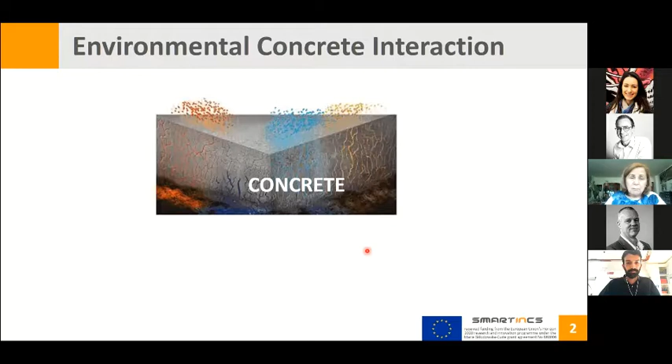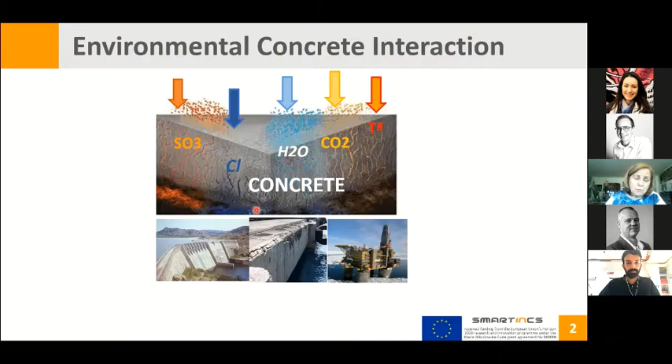Certainly the concrete is interacting with the environment from the very beginning it is located in the structure. There are many reasons for this interaction, parameters like SO3, chlorides penetrating through the concrete, water, CO2, temperature. In any case, when these agents introduce into the concrete, they cause several damages.

These types of interactions have chemical, physical, and mechanical effects, and in general all of them cause mechanical failures. We have heard about shrinkage and cracking generated by Erik Schlangen, water permeation addressed by Marta Roig, and also problems when we have sulfates and a very low temperature.

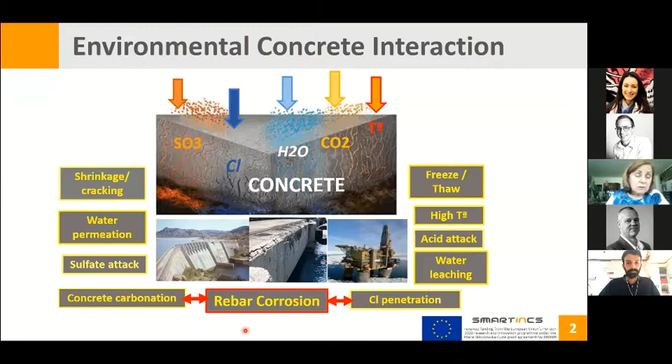Vanessa explained very well the acid attack or water leaching. But there are other interactions with the environment, like the reduction of the high alkalinity, carbonation, or chloride penetration. These two aggressives in general don't cause any specific damage in the concrete cover, however they are very dangerous for the rebar. So that is the reason we are concentrating on rebar corrosion.

I prefer to start by making a review of what can happen in the case of corrosion, to set the frame for the study. We start with the situation that our reinforcement is passive in the environment due to the high pH. However, due to interaction with aggressives like chlorides or CO2, they will penetrate through the cover and reach, in a certain time depending on the concrete cover characteristics, the reinforcement.

In the case of a decrease in pH, we have very small anodes and cathodes that cause the initiation of corrosion, extending more generally over the surface of the reinforcement. However, in the case of chlorides, this penetration generally locates attacks at specific points, so we have very small anodes with regard to larger cathodes, causing higher corrosion rates.

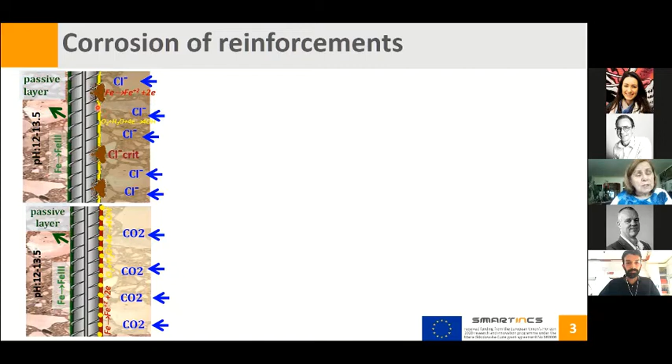Within the initiation period, we are interested in the transport of the aggressives, which is generally quantified by diffusion coefficients, and also the initiation of corrosion, which indicates the depassivation and the breaking of the passive layer. When we have chlorides in the system, they reach the rebar surface, but corrosion is not initiated at that moment.

The chlorides need to be accumulated at the rebar level until a certain threshold is reached and corrosion is initiated. In the case of carbonation-induced corrosion, the pH has to decrease below the passive threshold. This is due to the interaction of CO2 that penetrates through the pores, dissolves in the water, and reacts with alkaline components in the cement base like portlandite. Progressively, the pH decreases, and when it reaches a certain level, corrosion is also initiated.

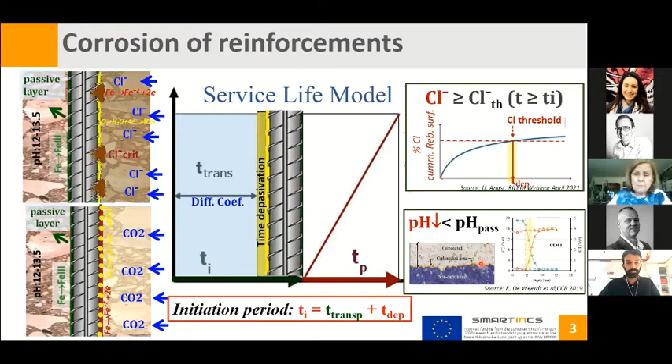Once we have this frame for corrosion of the reinforcement, we need to identify the transport of the aggressives, keeping in mind there is large variability in this identification, because there are many parameters influencing it depending on the concrete cover characteristics and the environment. For the second part, the depassivation period, we need to identify the time until corrosion is initiated, which depends on the aggressive and the characteristics at the steel-concrete interface.

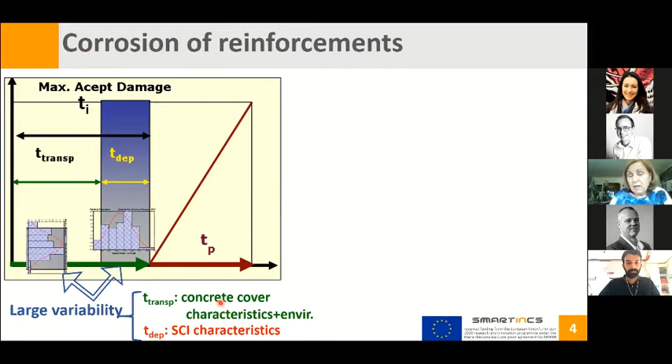To understand better the steel-concrete interface, I think this picture from the RILEM Committee paper identifies the different parameters that can influence corrosion initiation, such as air voids or the presence of oxides. We can see here that the crack is one of the parameters that influences this corrosion initiation.

The crack finally is not only a path for more rapid penetration of the aggressives, but it also changes the micro-chemical or micro-electrolyte environment at the rebar level, and so that changes the passive layer and, of course, the initiation of corrosion.

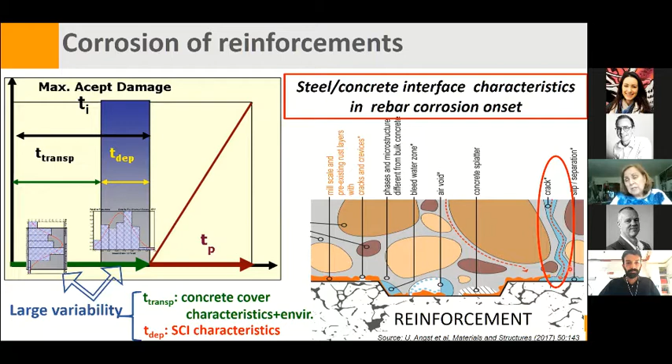So let us now move again to the crack, the presence of crack in concrete. As Eric was commenting, the structures are designed for cracking. They many often have cracks that we can observe in these pictures. Even these cracks can be healed and sealed along its life, or can remain unsealed.

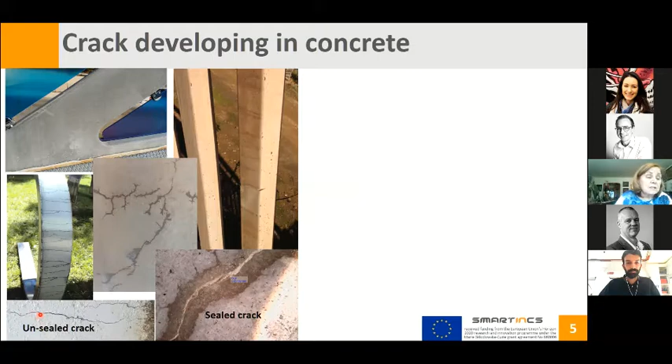How can this crack, in particular this deformation crack, appear when the structure is in operating condition? Consider we have under tensile stress, a crack appears and reaches the surface, which we identify as a primary crack. Also, due to these forces, some other cracks like secondary cracks can appear, and some others remain inside as internal cracks. Finally, what we have on the surface is a pattern of several cracks, transversal and longitudinal to the reinforcement.

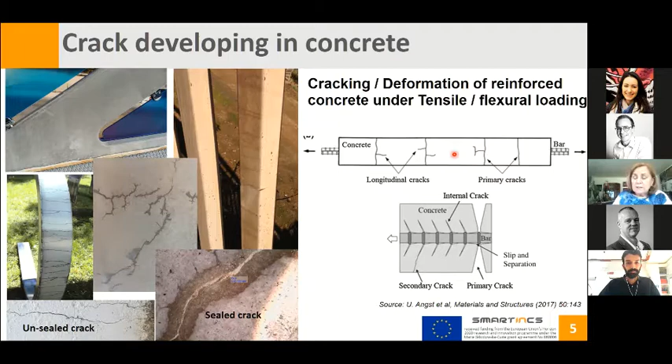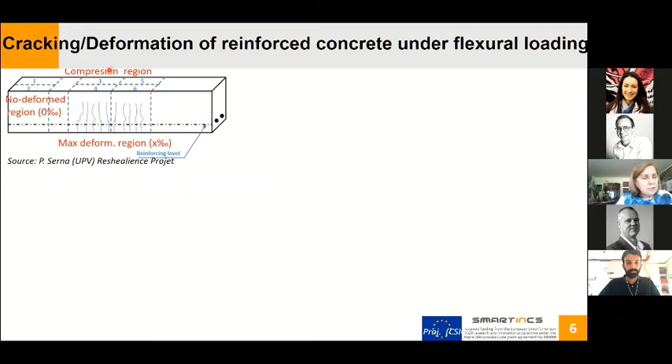These multi-crack conditions we have tried to simulate very well with Pedro Serna in the ReSHEALience Project. We are working together, producing this type of element that has been bent at steel bending points, locating several multi-cracking regions, the compression region with no cracks, and also the lateral regions with no significant cracking.

Analyzing this crack, we have a crack width on the surface depending on the deformation of the element, and depending on the type of concrete, the appearance of this crack is completely different, and also the size. You can see here the length and the distance between them is different and much higher in comparison with ultra high performance fiber reinforced concrete, which has a smaller length of cracks and a smaller width. We can also have regions with much smaller crack size.

We also need to take into account the crack depth, because these cracks can penetrate or not through the cover, and may not be able to reach the reinforcement, or may penetrate and reach the reinforcement, and even overpass and reach a second level of reinforcement. But how can these cracks influence corrosion initiation?

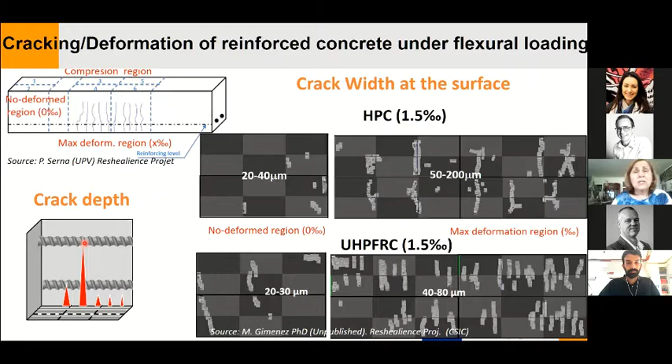Now is the moment to understand what happens with concrete in the analysis of the transport properties, one of the main parameters to analyze the service life of the structure. We are considering the transport that depends on the concrete cover and the environment.

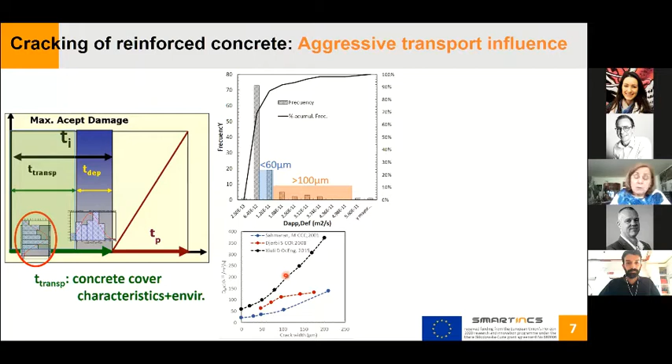Doing an analysis of the literature with chloride transport in different types of concretes, even in situ, we can observe that generally most results are accumulated in this region, but very high chloride transport in this case, or very low, depending on the quality of the concrete. When considering the presence of cracks, although there is not much information on that, it's clear that all authors agree there is a clear increase in the transport of aggressives, even coming from small cracks, and that it exponentially increases when the size increases. The diffusion coefficient depends on the size of the crack.

But can self-healing help and reduce the transport of aggressives? Although there is not much information in the literature, and we hope to improve this with the SmartInCs project, there are some papers that address autogenous self-healing. Although this is the uncracked situation and this is the cracked situation, after a self-healing process, the authors consider that there is a decrease in the chloride transport.

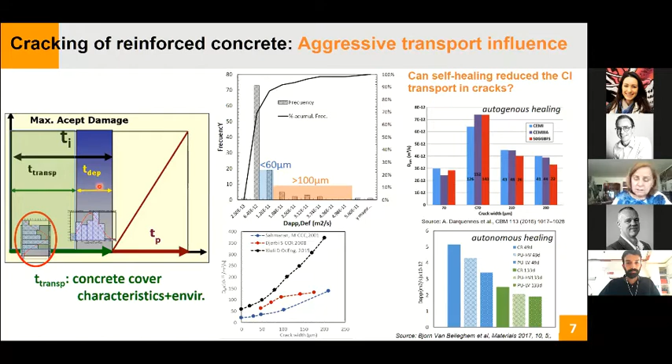This effect has also been observed with autonomous healing, which depends on the type of self-healing agent — in this case, polyurethane. This was also addressed by Nele De Belie in his talk, and they also observed a decrease in the chloride transport. So there are preliminary results indicating that self-healing can contribute to and enhance the durability of cracked structures.

For the initiation of corrosion, we need to deal with the moment corrosion is initiated, the depassivation moment. We need to characterize the rebar and use electrochemical techniques to identify when corrosion is initiated, either corrosion rate or corrosion potential. To remind again, we are in this situation where the aggressive is reaching the reinforcement, but now what we need is the accumulation of this aggressive until corrosion is initiated.

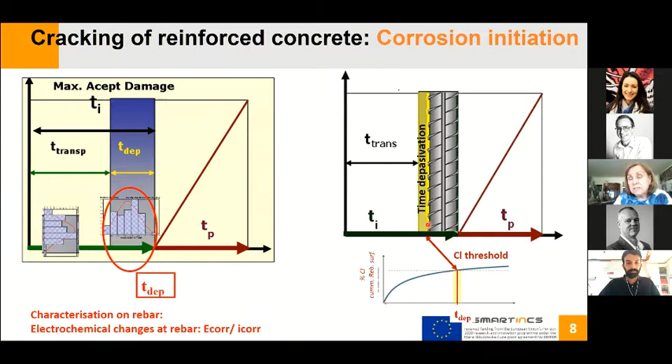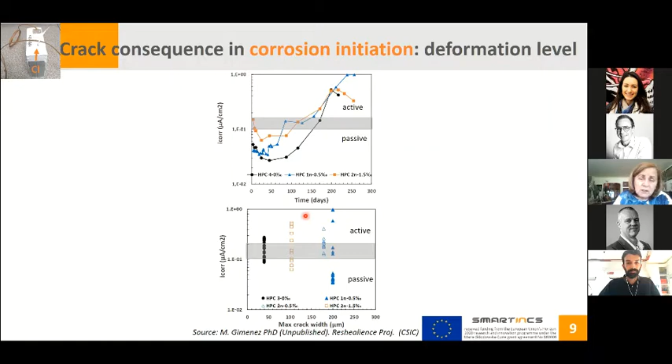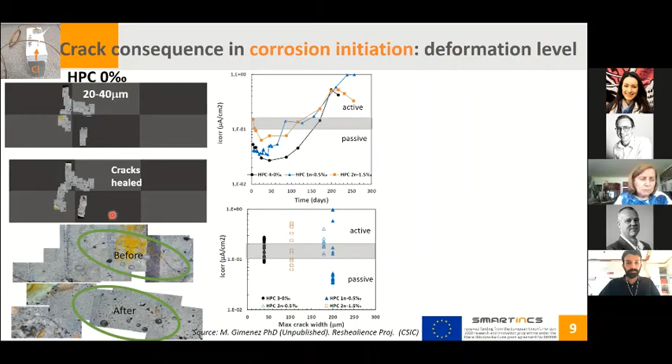What happens in reality? We can have small cracks. This crack can be healed, as observed here. However, the corrosion has been initiated, so it was not enough to support and protect the reinforcement. With higher deformation, the crack is larger, and we can have some healed cracks, but others will remain unhealed, and finally corrosion is initiated. This is before, and this is after exposure.

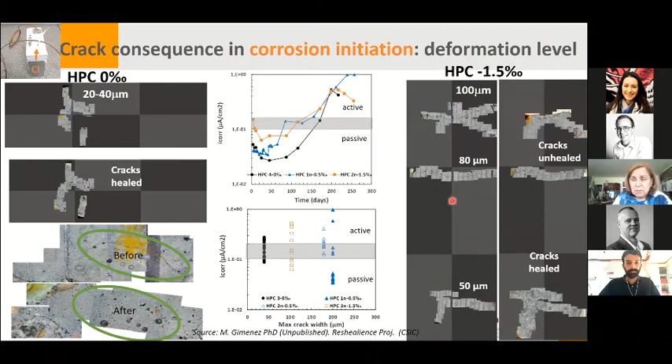But what can be the influence on the type of concrete? Here we are analyzing the high performance concrete and the ultra high performance fiber reinforced concrete, containing in this case also crystalline admixture and nanocellulose.

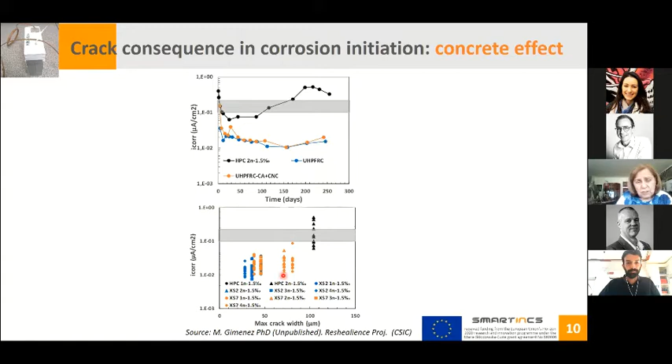While the high performance concrete initiates corrosion, and of course it has higher crack size due to the type of concrete, the ultra high performance fiber reinforced concrete has not initiated corrosion, even for a crack size at the surface close to 100 micrometers.

What we observe in this case with the HPC with 1.5 deformation, this is the initial, but after a period exposed to the environment, there are some cracks that are healed, but some others are not healed, so the corrosion was initiated. In the ultra high performance concrete, we have a different pattern of cracks, different size, and some of them are

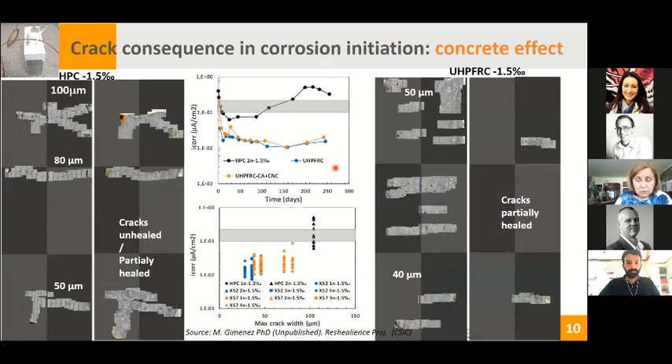healed, and even having some unhealed cracks, corrosion has not been initiated yet. Different reasons can be contributing to this performance.

This is the initial, and this is after the healing. But we have another aspect that we need to analyze in the corrosion initiation, that is the crack depth.

This is the specimen exposed to the chloride environment, and the chlorides penetrate to reach the two levels of reinforcement. In this case, whether you are in the first or in the second level, the corrosion has been initiated at practically the same time, and the crack is relatively high.

So probably the situation that we have here is that the crack penetrates not only the first level of rebar, but also the second level of reinforcement.

When we have the ultra high performance fiber reinforced concrete, however, the situation is significantly improved, and after a similar period of time of exposure, the corrosion is far from being initiated, even in the case of the second level of reinforcement. What could be the situation here?

That the cracks are very thin and are healed, and even if they reach the reinforcement, the corrosion was not possible to be initiated, or the cracks are not penetrating completely to the rebar level, and so they are healed, but the corrosion is not initiated.

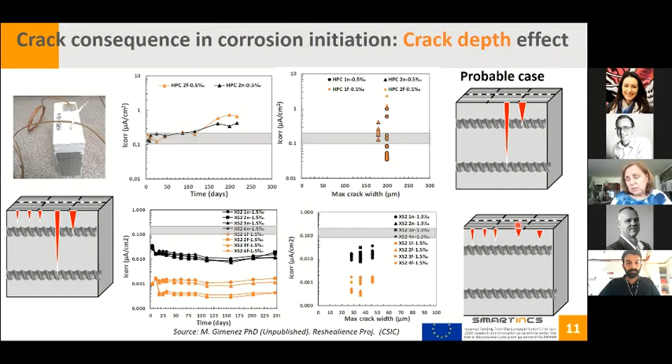But now we need another parameter, that is the chloride threshold. The chloride threshold, we are thinking of the moment of the depassivation, and to determine this time to the depassivation. So we identify the amount of chloride that we need to initiate corrosion.

Analyzing the literature data, we observe that there is a large variability, as I commented, mainly in the level of 0.8, the percentage of total chloride to initiate corrosion. Although the standards consider the value of 0.4 for new structures, and in some standards, they consider the value of 0.6 when they are thinking in service life for corrosion initiation.

There are very few data on this case, and some of them indicate really a clear decrease in chlorides to corrosion initiation.

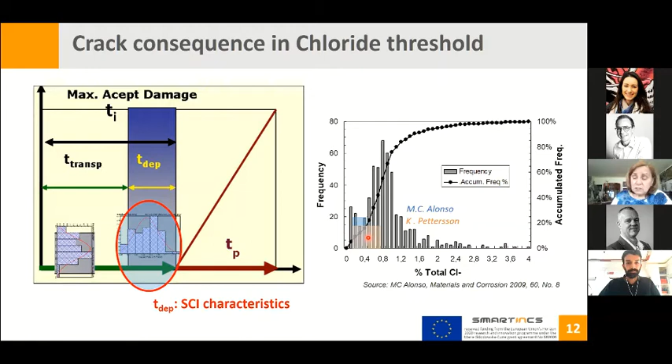So when analyzing the service life of cracked structures, we need to think that there is not only a higher transport of the chloride, but also we have a decrease in the chloride threshold. As I mentioned before, the environment around the reinforcement in the crack is clearly changed, and can be the reason for the faster initiation.

So what is the durability strategy that we are interested in? We are interested in non-active maintenance for long-lasting service life. Introducing self-responsive capacities in the structures with predictive, preventive, or corrective functions can help us. This was the idea of this workshop within the SMARTINCS project.

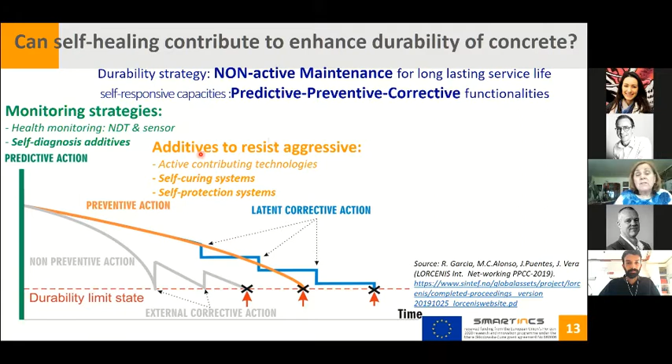For predictive action, we can predict the evolution of the structure, monitoring it using sensors or using self-sensing additives, which were also mentioned here in this workshop. But also we can introduce additives to resist the aggressive environment, or a self-curing system or self-protection.

The idea is to extend the service life of the structure. And also we can introduce what is identified as latent corrective action, that is self-healing systems. The idea is that the structure itself tries to repair and recover to extend the service life.

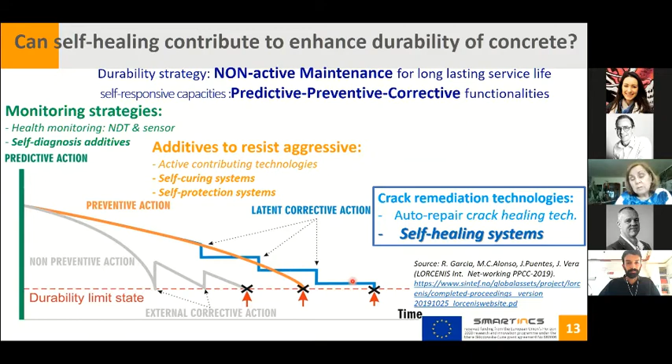How do we introduce this in relation to the case of self-healing with regard to reinforcement and durability? What could happen if the environment interaction takes place simultaneously with the self-healing of the structure?

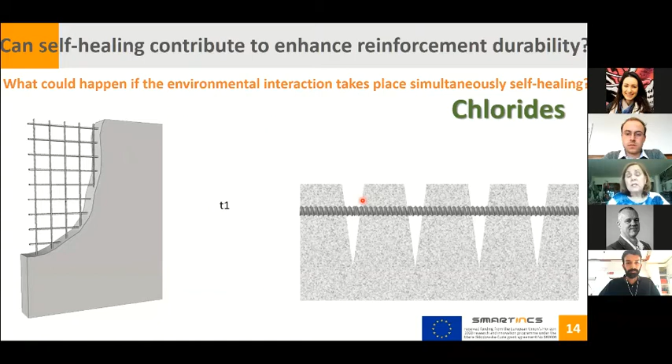Of course, we have this element with the reinforcement, and if in our structure we have cracks, we can expect that. Through this crack, the environment is interacting, and the chloride is penetrating and reaching the rebar through these cracks, and then the corrosion will be initiated.

However, we have a phenomena of self-healing of the crack. The self-healing could only partially cover the crack, and then it's impossible to completely avoid the initiation of corrosion. There could be a self-healing of the crack, but that self-healing is not able to avoid the penetration of the aggressive, and finally the corrosion is initiated.

Marta Roig-Flores was showing also some real responses in this direction.

Or we can have a sealing from the surface, but this could not be enough to avoid the penetration of the aggressive, and finally the corrosion to be initiated.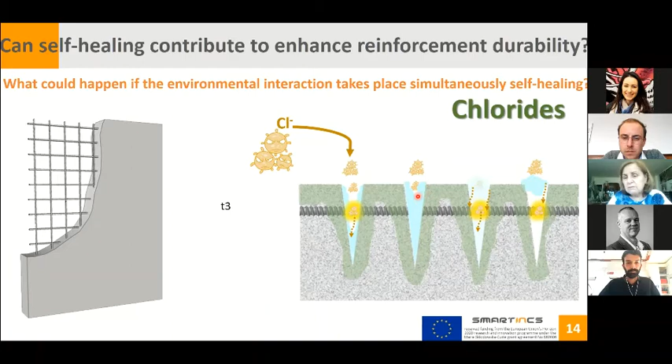However, it could be a very challenging and the most interesting aspect, that the self-healing of the crack is dense enough to avoid the penetration of the aggressive, and the kinetic will be fast enough to allow the self-healing of the crack before the aggressive penetrates to the rebar and initiates corrosion.

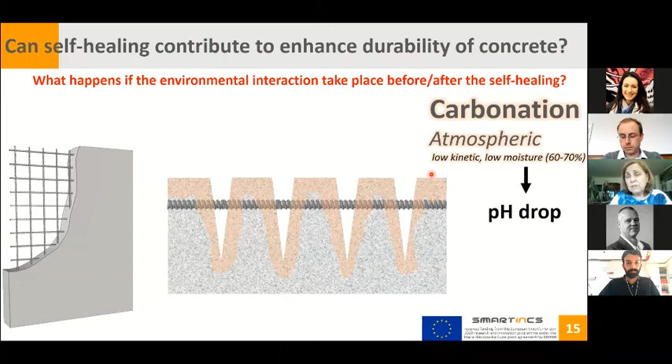In the case of carbonation, we can have a very similar performance. Carbonation, if in the atmosphere, has low kinetic, low moisture, and the pH drops, and also corrosion initiates, but as we commented, it is more general, extended on the surface.

We can have a similar problem when we are thinking about avoiding corrosion initiation at the rebar level, if the self-healing of the cracks is allowed.

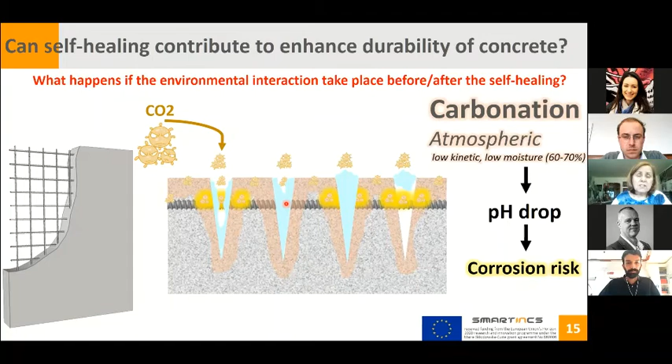To finalize, I want to analyze this through this experience and analysis. What are the parameters that could be influencing the crack healing versus the rebar corrosion?

We have observed and presented today different cases where we can have a surface self-sealing, however not a complete self-healing inside the cracks, and it's not able to protect the crack completely.

So clearly what we are not interested in is having a crack where there is no healing process. In this case, the rebar is not protected and the corrosion will be initiated.

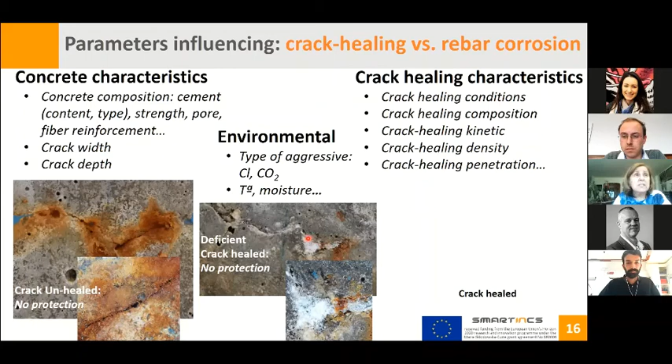However, we can have a healing process of the crack, but this healing is not enough to protect the reinforcement, and the corrosion is again initiated.

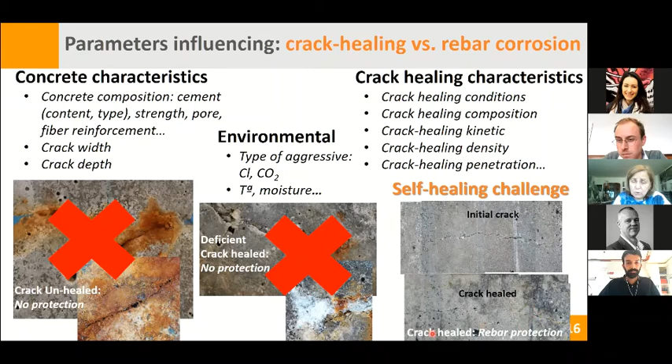However, we can have a final step, and that is the challenge of SMARTINCS and self-healing with regard to corrosion: although we have a crack, this cracking will be healed in such a way that it is able to protect the reinforcement, and corrosion will not be an issue.

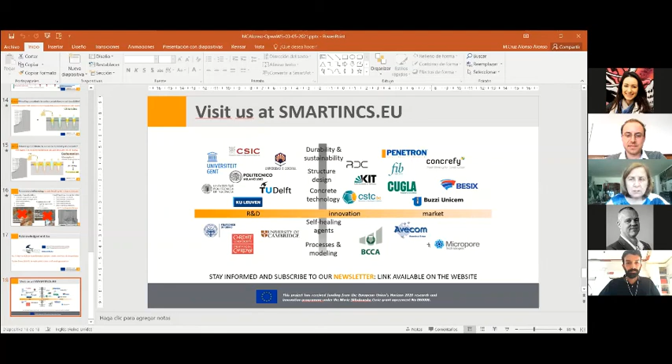Okay, thank you very much, Maria Cruz.